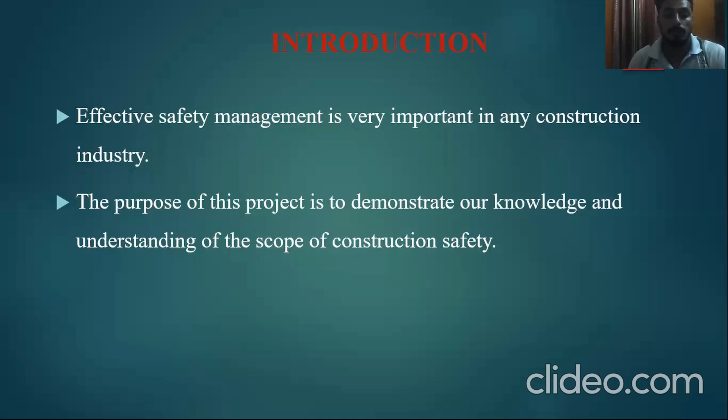This is the project delivery system. The project delivery system is a matrix organization which shows the contractual relationship between the parties involved. It defines the structure, relationships, roles, and responsibilities of different entities involved in a general sequence of activities to deliver the project. For this particular project, the construction management project delivery system is used, and the CM acts as a representative of the owner and supervises the entire project. It saves cost and time. The system involves owner, CM, contractor, architect, supervisor or field engineer, construction administrator, safety officer, workers, etc.

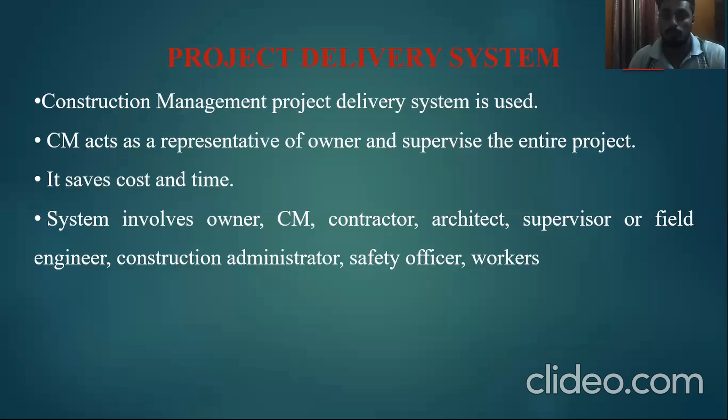This is a particular organization structure, a flow chart of the organization structure of this project. In this structure, the owner is at the top, and then comes the CM. The owner has no building experience, so the CM takes the main role.

It is a construction management structure system. It applies a contract-based management system. So the CM controls everything and has the high authority. The architect, contractor, design manager, and construction administrator all come under the CM. The architect has sub-consultants, the contractor has subcontractors, and the construction administrator has superintendent and field staff.

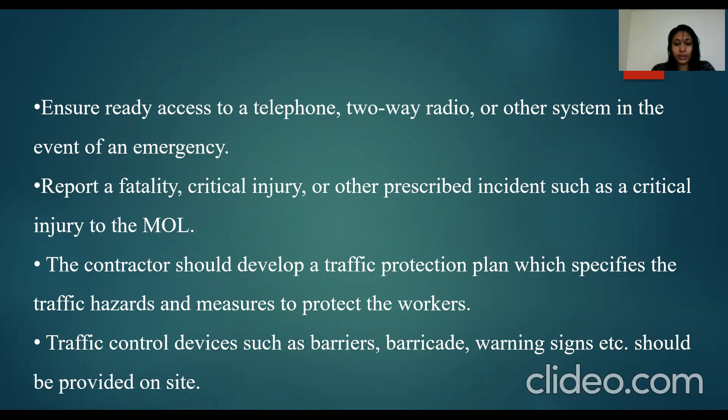The second role is the owner. The duty of the owner is to ensure and spend money for the safety and regulations prescribed in OHSA, provide and maintain all prescribed equipment, material, and protective devices, and take every precaution reasonable in the circumstances for the protection of workers.

If the number of workers is more than 5, the owner should appoint a supervisor to ensure the safety of workers. The owner also wants to provide training to the workers in safe handling of equipment and practices to be followed on the site.

The third role is supervisor or field engineer. The field engineer ensures that workers use protective equipment such as traffic safety vest, helmet, gloves, etc. He advises workers about actual or potential health and safety hazards, supervises and provides guidance to the workers regarding safety policies, and analyzes, collects evidence, and submits reports regarding hazards on the job site.

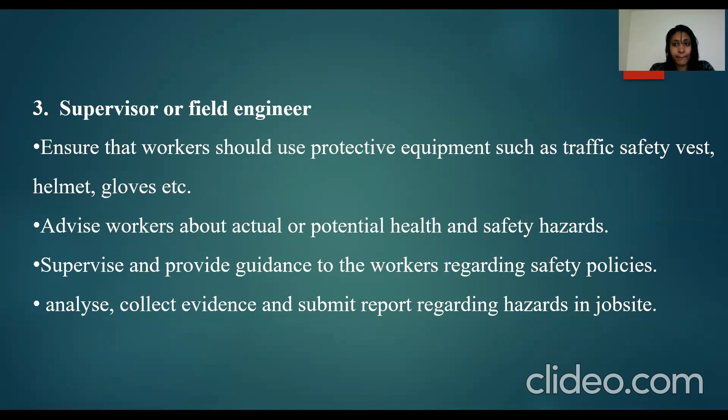Thank you, Shahina. Hello, I'm Adra Thampi, and I'm continuing the roles and responsibilities of our project. So next is the project manager.

The project manager is responsible for inspecting the workplace and maintaining the safety and health of the workers. While preparing the bid, he must ensure that safety rules and requirements are included in the bid package. Also, the project manager should revise the safety policies periodically and modify them if necessary. That's all about the important duties of the project manager.

Next is the duties of workers. The workers should take care of themselves. During work time, they have to wear safety equipment, and they are also responsible for maintaining the safety equipment in good condition.

In our project, there are many moving equipments and vehicular movement in our work. So if workers are dealing with moving equipment, they have to be trained in that operation. Also, if they feel that operating such machines causes difficulty or harm to others, they have to immediately stop the work. Another important responsibility of the worker is to participate in the safety committee.

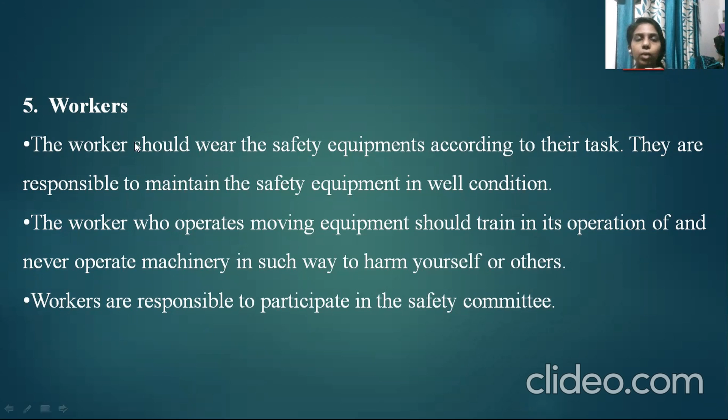The number of workers in our project is 5 to 20, so they should select one representative from the workers to the safety committee, and they should continuously participate in the meetings without any disruption.

Next is the duties of a safety officer. The safety officer should assess and identify the hazards in the job site, and is also responsible to plan, implement, and monitor the health and safety policies in the work site.

If there is a requirement for training for workers, the safety officer should prepare and conduct that training. It is also the duty of the safety officer to ensure that all workers are using safety protective equipment, and if they find workers are not using it, he should compel them to do so, and tell them to obey safety rules and regulations at work.

Also, if there is any work which may cause hazards or harm to others, the safety officer should supervise the work from beginning till the end. That's all about the roles and responsibilities in this project.

Next is the risk assessment. We know that risk assessment is very important for every project, because when starting a project we have to assess the risk and take precautions to avoid risk and hazards to the workers. Risk assessment analyzes the various risks associated with the project, how they affect the workers, how we can prevent that, and also discusses the precautions and equipment used in this work.

That's all about my presentation. The remaining section will be handled by my teammate. Thank you.

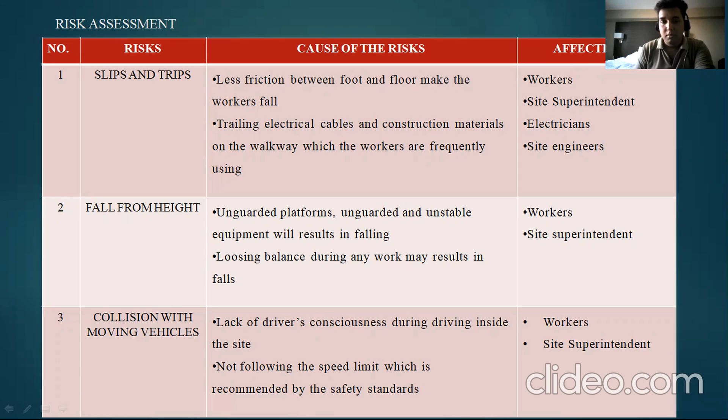This usually doesn't happen due to the driver's mistake, but due to other factors like no warning signs, no people to control traffic, and no emergency requirements like a beeping sound or a red rotating light on the vehicle. The people affected include workers and site superintendents.

And struck by fallen objects. This usually happens to people who are not aware of construction projects, like visitors, and also due to not wearing a helmet and other safety jackets. It also affects workers and site superintendents.

Striking against fixed or stationary objects also happens, along with the danger of electricity. Struck-by-fallen-object and striking-against-fixed-object risks usually happen to people who are not aware of the site plan and construction project, particularly visitors, who tend to fall under this category.

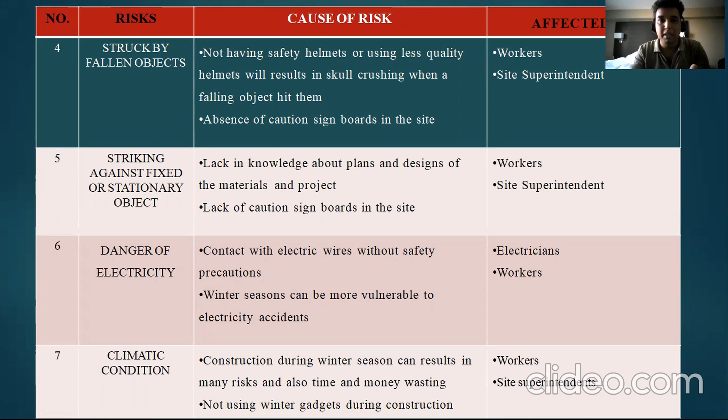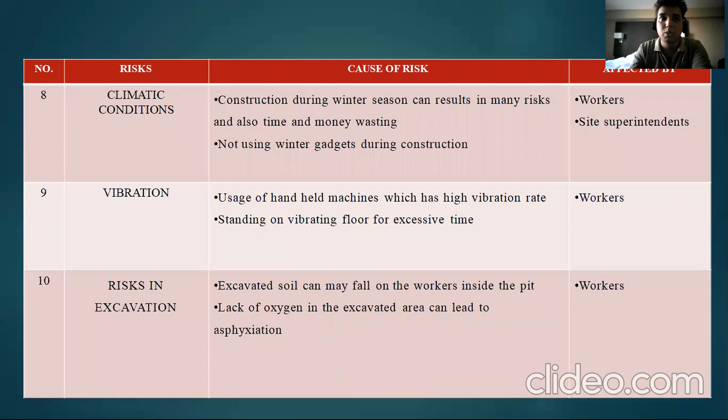The risks in excavation: it's a risky part in construction. Usually people tend to dig 3, 4, 5, 6 meters deep, and they need to be cautious about the lack of oxygen. Most people do get cautious, but some don't get cautious, and they become unconscious and fall at that depth. These things happen mostly due to being unaware of soil capacity and lack of detailed study about soil properties, etc.

The next topic is the safety plan. Safety plans are documents to identify various hazards or risks that could cause harm to the workers and other personnel at the workplace. They include policies and procedures to prevent accidents and outline the steps to be taken if an accident occurs, the people affected by these risks, and the personal protective equipment needed for the identified risk activities. It also ensures all the insurance and benefits that can be obtained after a risk occurs to that particular person.

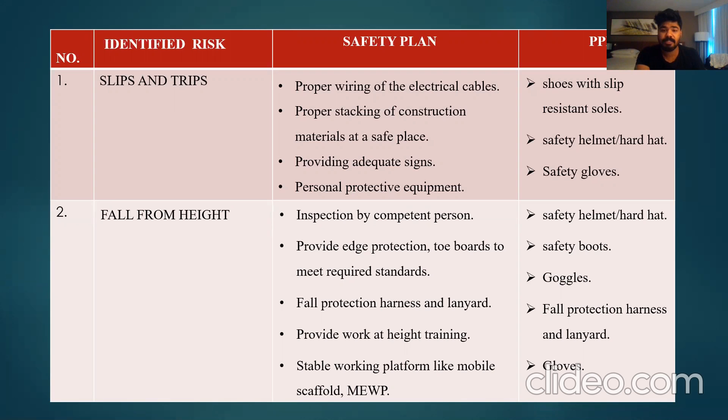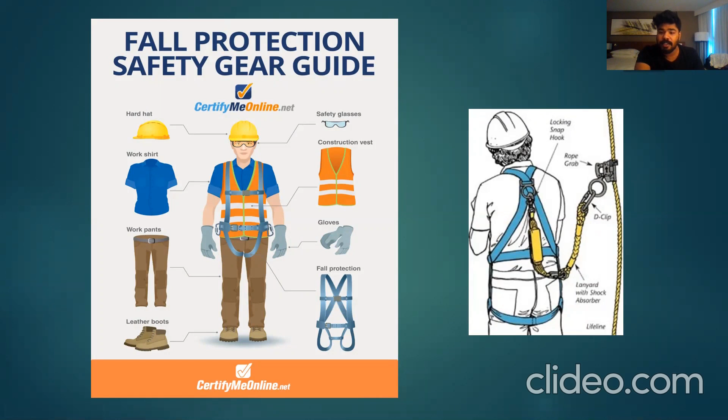In the next slide, we'll take a look at fall protection safety gear. This includes a hard hat, safety glasses, construction vests, gloves, and a fall protection harness, and on the right side figure you can see how the lanyard is fitted with the shock absorber.

The next one is collision with moving vehicles. The safety plan is providing adequate barriers with warning signs, identifying clear walkways, providing reflective jackets, and clear signposting. The PPE required for them are safety helmets, safety boots, and night reflecting jackets for workers working during the night to make them visible to oncoming vehicles.

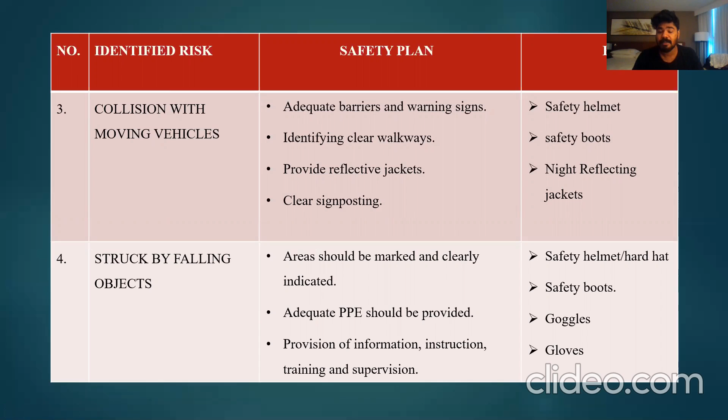The next one is struck by falling objects. Areas should be marked and clearly indicated where there is a chance of objects falling, and adequate PPE should be provided. Provision of information, instruction, training, and supervision should also be provided. The PPE required are safety helmets or hard hats, safety boots, goggles, and gloves.

The next one is striking against fixed or stationary objects. The workplace should be well illuminated, adequate training should be provided on this risk, enforcing the use of adequate PPE is important, and proper site housekeeping should be done. The PPE required are safety helmets or hard hats, safety gloves, safety boots, and safety goggles.

The next one is the danger of electricity. The safety plan includes providing ELCB or RCD according to choice in the workplace, and more electrical circuits to prevent overloading of a particular circuit. Training and awareness programs should be provided, and proper insulation of wires and cables on site to reduce the danger of electricity. The PPE required are safety glasses with side shields, face masks or shields, insulating gloves to prevent danger from electricity, and steel-toed boots or dielectric footwear should be provided.

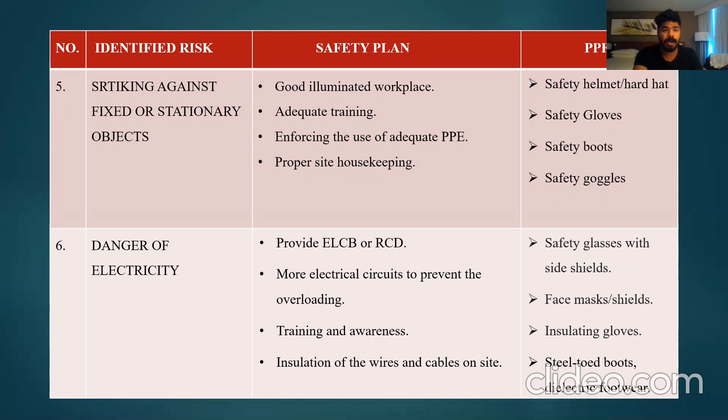The next identified risk is noise risk. The safety plan includes eliminating or reducing the noise at source, providing barriers to reduce the intensity of noise, and limiting duration and exposure to the noise by the workers. Provision of PPE should include earmuffs and earplugs, and quality equipment and machinery should be provided on site, which reduces the noise risk to an extent.

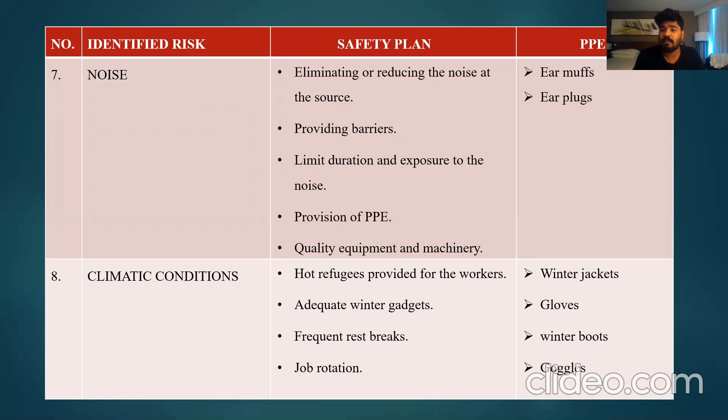Next is climatic conditions. We'll be taking cold climatic conditions as an example. Hot refuges must be provided for the workers, and adequate winter gadgets should be provided. Frequent rest breaks and job rotation are very important to reduce the effect of climatic conditions on workers. The PPE required are winter jackets, gloves, winter boots, and goggles.